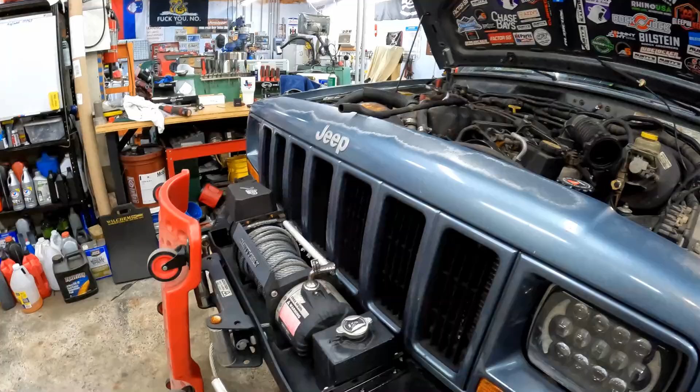So today we are going to be working on the Cherokee, and we're going to be redoing the transmission lines with PTFE or Teflon braided hoses with 6 AN fittings. And the reason we're doing that is because if you've seen the previous video, I added an oil cooler up under the front of this. See where my light's under there.

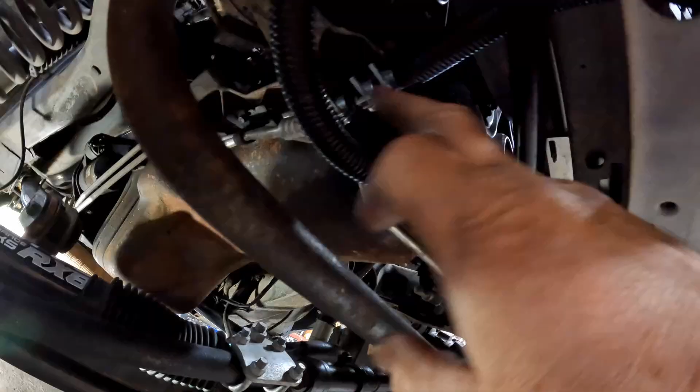So we added an oil cooler and experimented around with which hoses we were going to put the oil cooler in and stuff. And you can see this has all been just cut into the hoses that were already on here and clamped in a temporary fashion on barbed fittings, just for the experiment. And in doing this, I figured out how I want to mount the cooler.

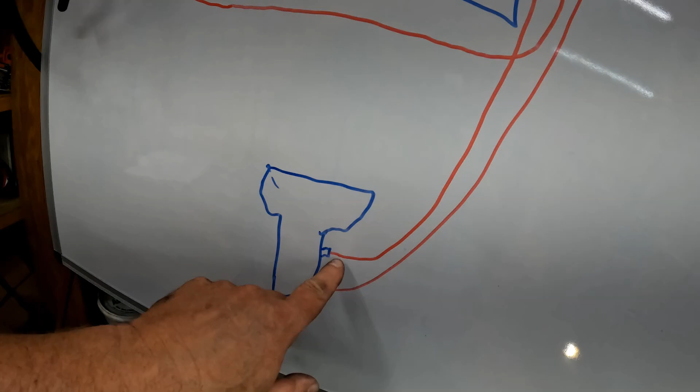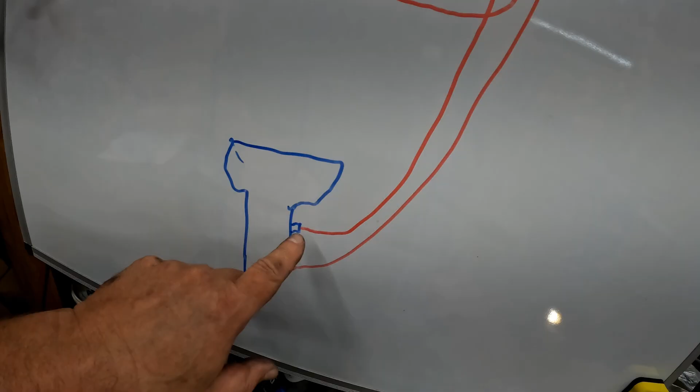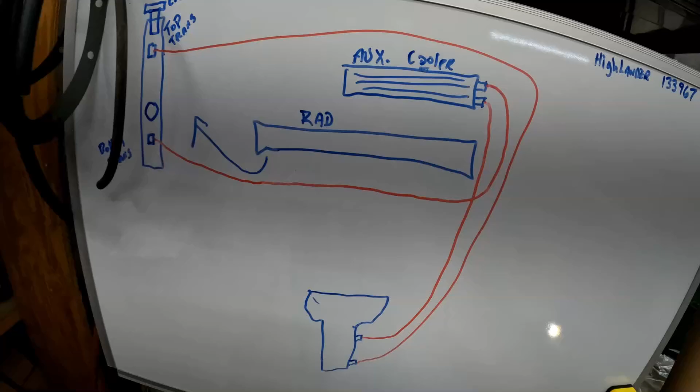So the way this is going to work is on the AW4 transmission on the Cherokee, the front line is the outlet, and the rear line towards the rear of the vehicle is the return. So we're going to run the line from the outlet here up to our auxiliary cooler, through our auxiliary cooler and out to the radiator, and then back from the radiator to the transmission.

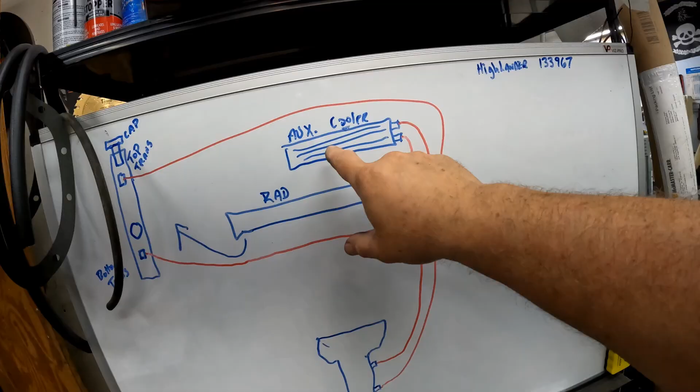What I figured out was this thing never really overheats, but every once in a while when it's really hot outside and you're going up a big hill, it would go a little bit above 210. And I wanted to get rid of that. I want to stay at 210 like it's supposed to. Well, I figured out that it was the transmission that was adding that extra heat to the radiator.

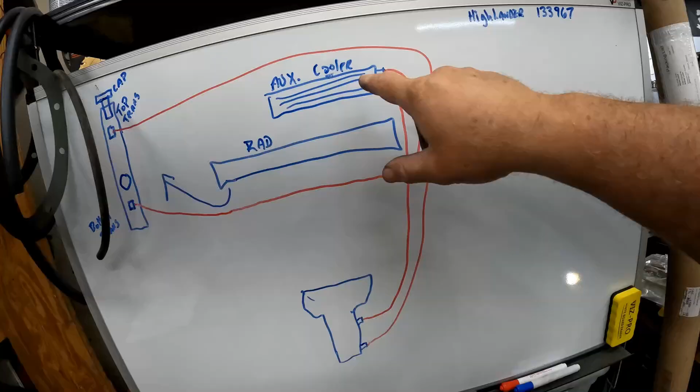Now, I've done two things to address that. One, I started shifting this thing into third gear manually rather than let it downshift, which prevents a lot of slipping. So that helps. And then we have this cooler. So by mounting it like this, we're cooling the oil down before it goes into the radiator. So then the radiator stays at 210.

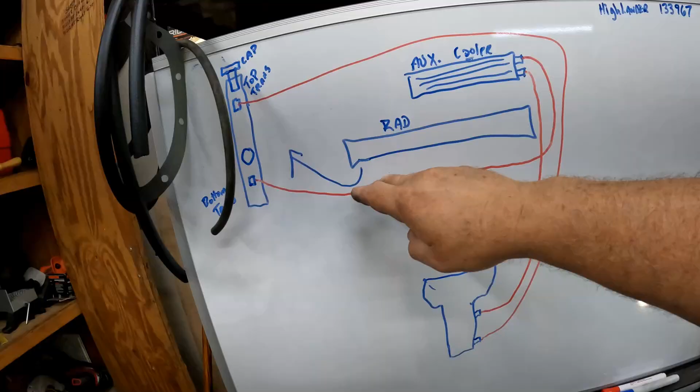But we're still getting the 210 degree oil coming out, going back to the transmission, so that you still get the wintertime preheat on your transmission oil. That's why they ran it through the radiator like that. So regardless of all that, what we're going to do today is we're going to build some AN fitting lines.

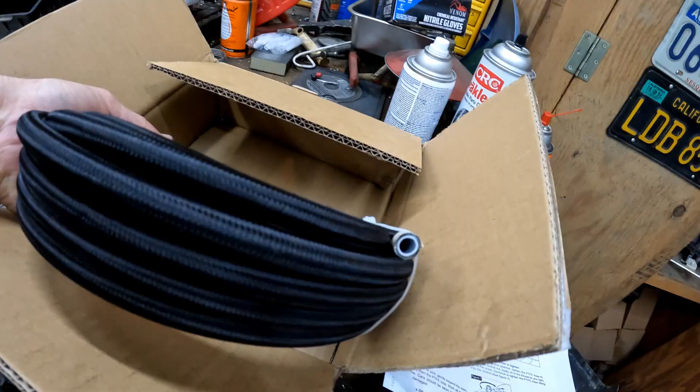So I've bought some PTFE Teflon braided hose and an assortment of fittings. Now there's some fittings that you have to get in order to make this work with the Cherokee. One of them is this, which is an inverted flare number 6 to a 5/8-18, and that is one of our radiator fittings.

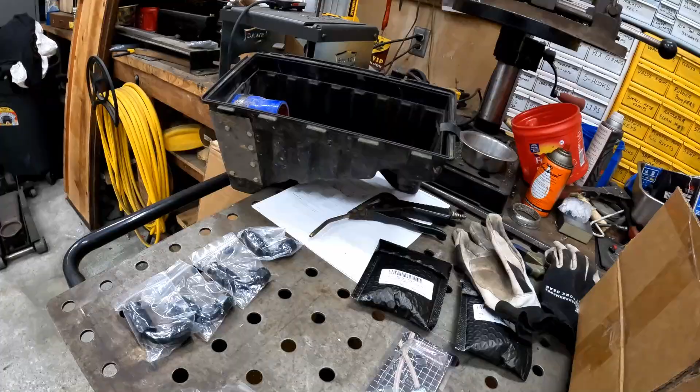And then you also need what they call a fuel line fitting for the bottom radiator, where the hose goes in the bottom of the radiator. Quick disconnect type. And then to go into the transmission, I think these are them. We've got some of these, which are... let me get my glasses on where I can read it.

These are M14 by 1.5 millimeter male metric fitting adapter, aluminum alloy, 2 pieces. So basically where the lines go in the transmission and those quick disconnects, it's an O-ring fitting. So these have an O-ring and they're metric on the one side and then AN-6 on the other. You could get all these parts off of Amazon.

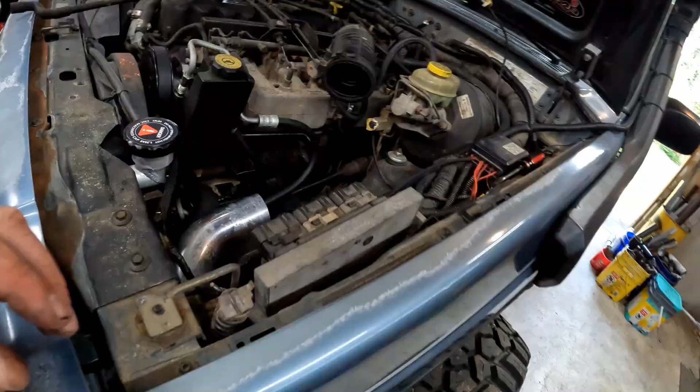And then I also have some 6 AN to 3/8 pipe adapters for my oil cooler. And you can see I have already removed my air box. I've got my intake pipe sticking out there, just to give me a little bit more room to get to these fittings where they go into the transmission.

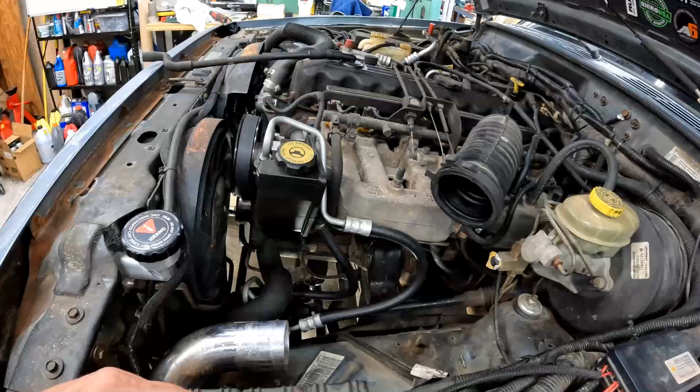So first things first, I'm going to go underneath and start stripping all of the factory lines off, because we're getting rid of them and I need to get them out of all their clamps and everything, and start draining the oil that's in the lines and the cooler out so that we don't make a huge mess.

Now I have a video for replacing the transmission lines with the factory ones, and you can search through and find that one if you're trying to figure out how to replace the factory ones. I'm not going to film taking all that loose because none of that matters. I will come back when we start to do all of the stuff to adapt it to work with the AN fittings and the braided hose. So let me get all that stripped out of there and I'll be back.

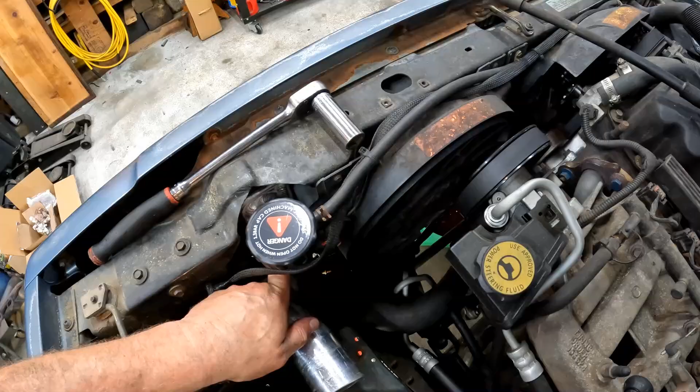Alright, I've got all of my lines pulled off and out of the way. So the next step is going to be to put the adapter fittings on the various places. Like for instance, here on the transmission cooler in the radiator, we've got to replace the top fitting with one that will fit a 6 AN line, and then the bottom is a quick disconnect, fuel line quick disconnect from the factory. So what we're going to do is use a fuel line quick disconnect to AN adapter.

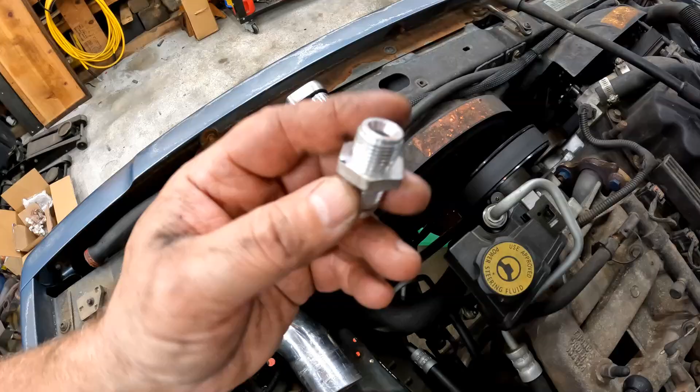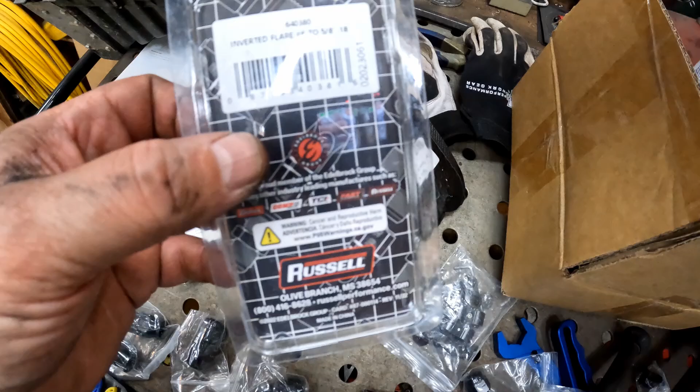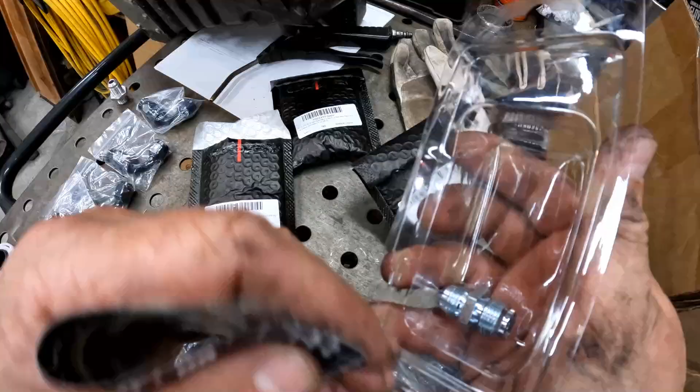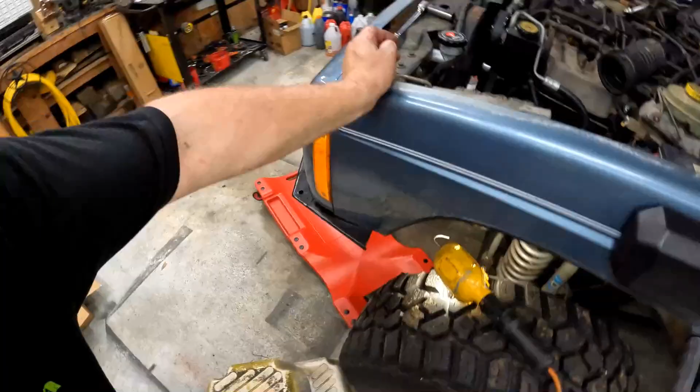So first we're going to unscrew this top fitting, which I loosened right before I turned the camera on, and you can see it is an inverted flare fitting, 5/8 18 thread here, but this piece is larger than a 6 AN. So what we've got right here in this box, we've got an inverted flare number 6 to 5/8 18. Right there. So we're going to screw that in place in this radiator, and that will allow us to attach a 6 AN hose to it.

And these inverted flare, they're much like a JIC fitting or other different fittings. They don't use O-rings, and you don't really want to put Teflon tape or anything on them. Now I'm having a little trouble getting this to thread in here. It should. There we go. Guess I wasn't holding my mouth right. So we're going to turn that in there and torque it down. Extension. Now we got it. All right, so we're ready there.

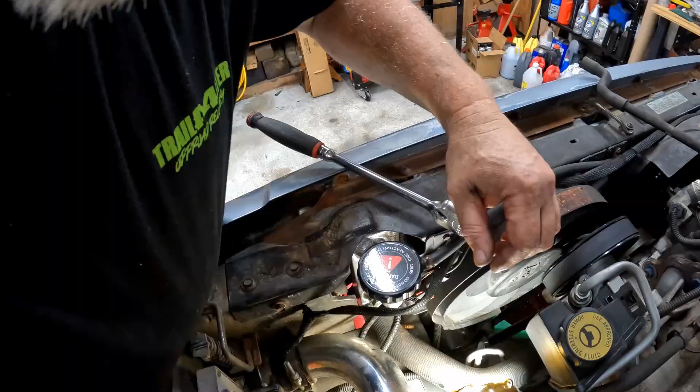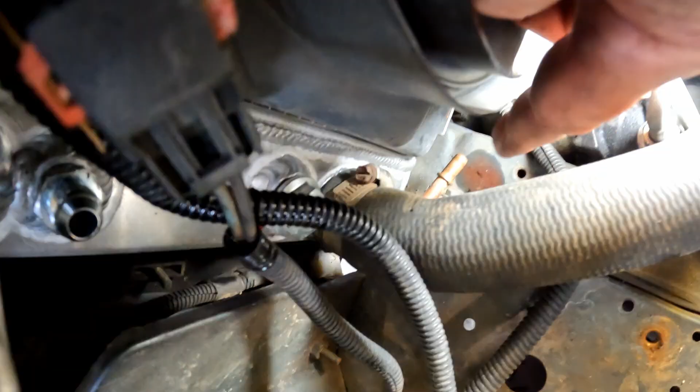Now we've got to do that bottom. So down there at the bottom, see if we can get this down in here. Down here at the bottom, you can see it sticking out right there. There's basically the kind of quick disconnect that comes on fuel lines and such. And since it's down there in that hole, and I can't really show you how it works down there, I have an extra, so I will demonstrate how this fitting works on this extra line.

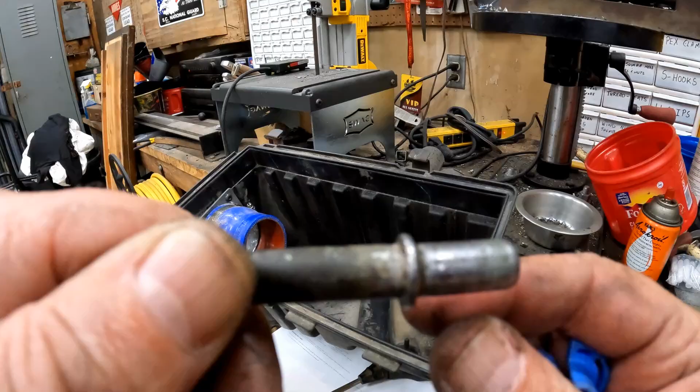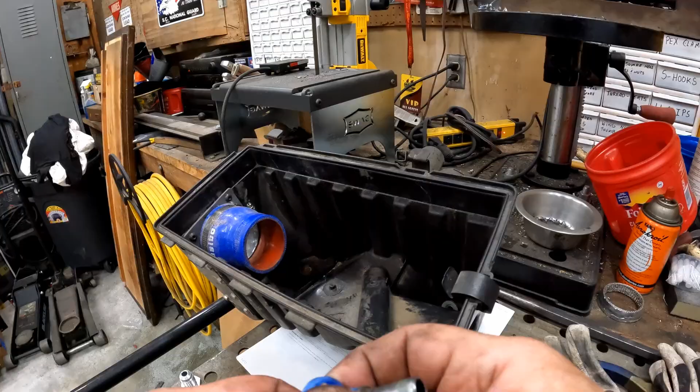So what I'm talking about are these type fittings here, and if you've been doing this for any length of time, you recognize this. It's got another piece that fits over the top of it with little clips that hold it in place, and then you have to use a tool like this and you push it up in there to release those clips from behind that lip, pop the fitting off. And the fitting has an O-ring in it, and it's built into the end of the old transmission line.

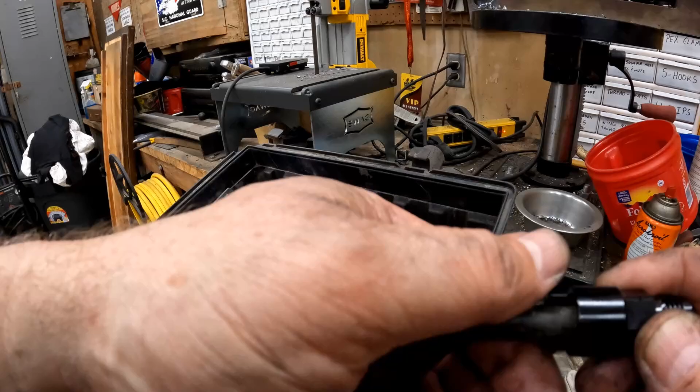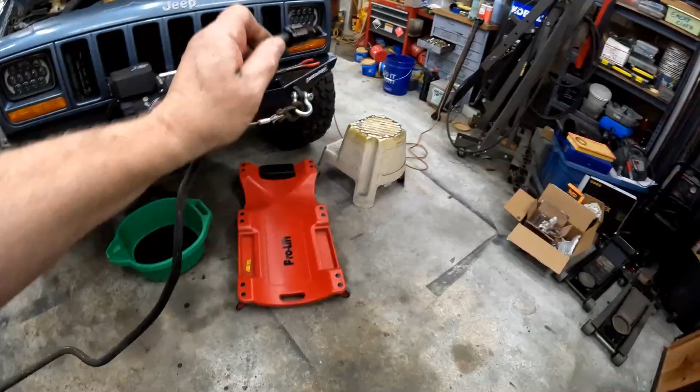So what you have for these type lines is this fitting. So you got 6 AN here, and then on the other end you got this kind of contraption looking. So this unscrews out of here like this, and this piece will go up on here like that. That's why it's got a slot cut in it. And then your piece with the O-ring down inside that fits on here and seals will slide on there like that, and then this piece screws into the back of it, and when it gets all the way down it catches the lip in there, and then you can screw your 6 AN line fitting onto it. So that's what I'm going to do down in that little hole, but there's no way I can show it to you down in that hole, so this is how that works.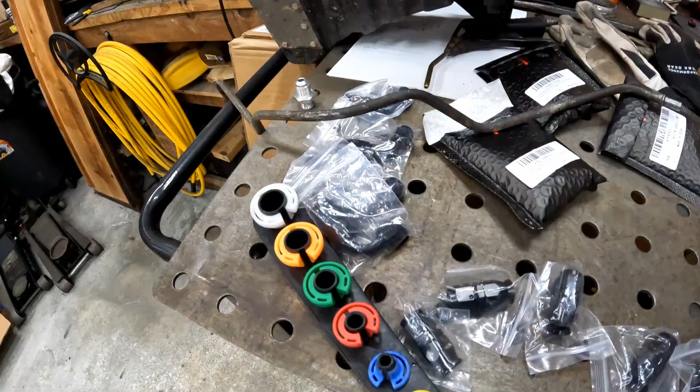So I'm going to get that one on, and I'll get the two in my cooler on, because they're just 3/8 pipe to 6 AN adapters. So I'll just pull the 3/8 pipe to barb adapters that are in it out, put the 3/8 ones in, we'll be good to go. And then we got the fittings to adapt to the transmission, which I'll bring you back for that part. Once we get those in, then we can start building the lines, get to the good part.

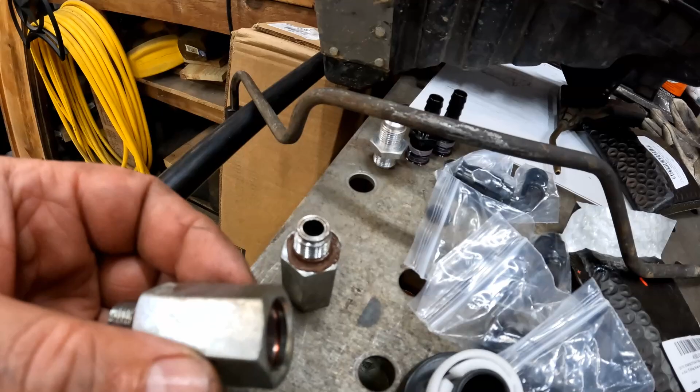So I'll be back. Okay, so I've pulled the two quick disconnect fittings out of the side of the transmission. So that's what they look like. We'll hold on to them because they're still good. And those are going to be replaced with these.

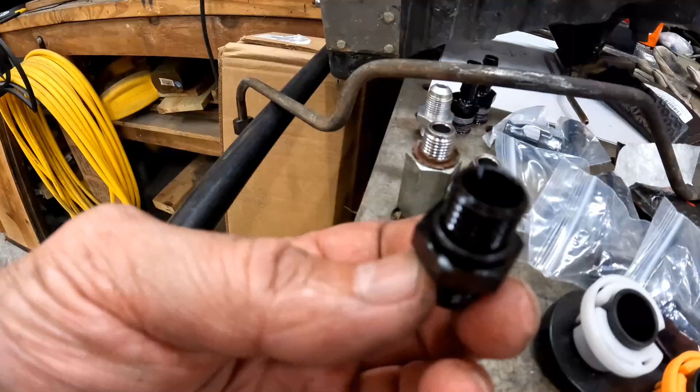Hold on just a second. So if you look at these, you can see the remains of a well overheated O-ring around that. They weren't leaking, but of course once you turn them it tears everything up. So you can see these new fittings are the same threads, and they're an O-ring fitting. So that's the adapter that you have to get.

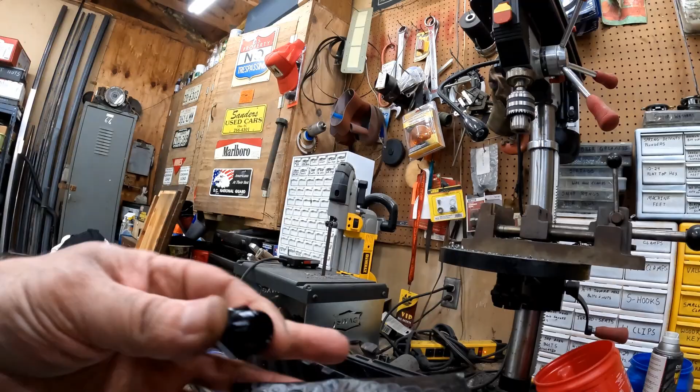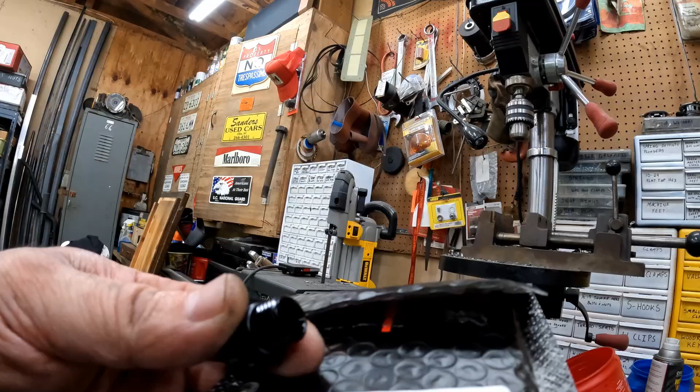It's got that on the one side and AN-6 on the other, and it's 6 AN male flare to M14 by 1.5 millimeter male metric fitting. That's what it says. And you can see there, pause it and get the serial number off of it. So we're going to screw these into the side of the transmission, and then we'll finally be ready to build our lines. So I will bring you back for that.

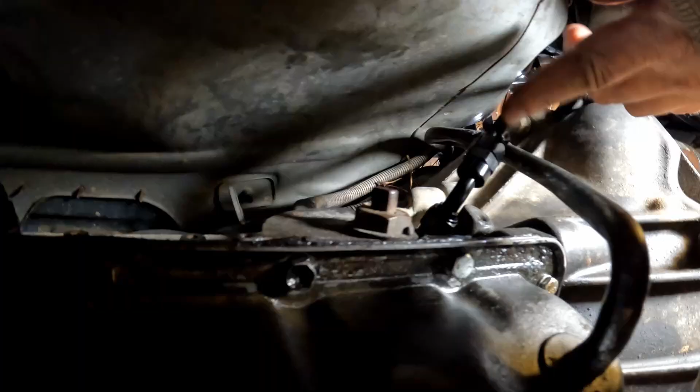Okay, let me show you what I've got so far. Hopefully I'll be able to get the camera up in here and you'll be able to see everything. So I've started to run the line going from the outlet on the transmission up to the cooler. So if we get this light shining where we need it, we're looking up in here, and here is the AN fitting. I was going to use a 90, but I ended up having to use a 45 because a 90 was interfering with the dipstick tube right here. So I used a 45, and it's not touching the dipstick tube, it's close.

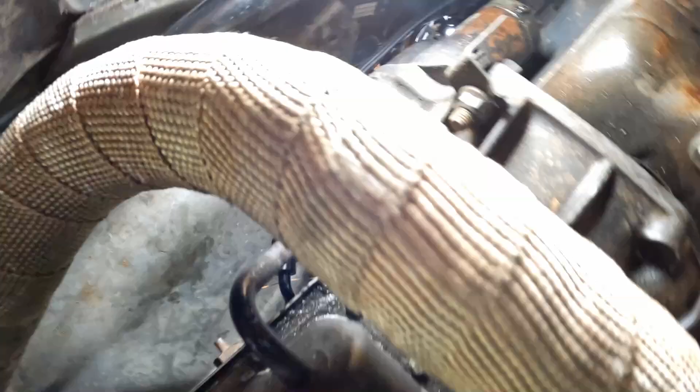And then we've got that run up along there. I'm going to use the old bracket for the little short arm suspension up there to tie it down, since I have long arm suspension now. And get you flipped around here with the light. You can see we've got it run right there along the top of the frame rail, over that bracket, and on up to the front, where we will go now to mark it so we know where to cut it. And then we will cut it and put another fitting on there, which I will show you.

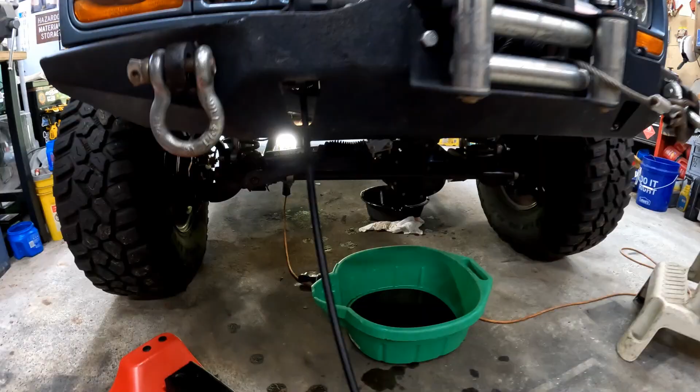I got ahead of myself and did the first fitting and forgot to turn the camera back on, but we're getting there. So we'll grab our creeper. This would be a lot easier if I had a lift, but I don't really have a high enough ceiling for a lift to be a viable option. Get down here where I can show you this other end.

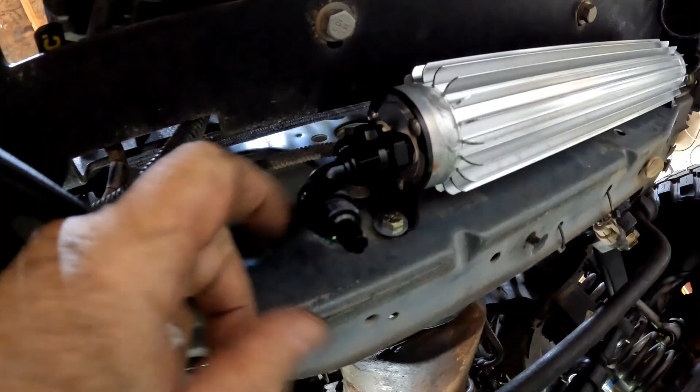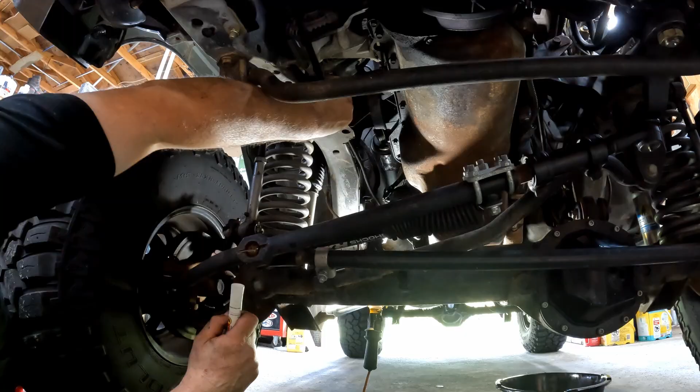So we've got our hose coming down the frame rail there and out here, and right here we've got a fitting loosely put in there. So we just need to, hold on, let's see if I can get it. All right, we've got to get the hose back up there where we want it. Keep enough slack in it. Lay it over here, and then we can mark it where we need to cut it to put the fitting on. Right there.

So now we've got our mark on the hose right there, and we can take this fitting back off and take the fitting at the far end back off and bring the hose up on the workbench and cut it and fit this fitting on there and get our first line done. So let me get the hose out from there and to the workbench.

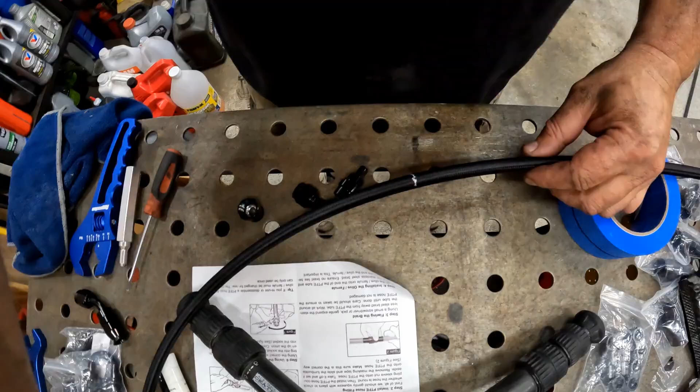Okay, so we're back on the workbench now, and we've got our hose here. We've got our mark we made where we need to cut it. So I've got some masking tape that I have drawn a center line on. We're going to take a piece of that and put the center line on our mark, and wrap that around nice and tight, like so. And then we can put it on our handy wood block here and take a cut-off wheel and cut it off.

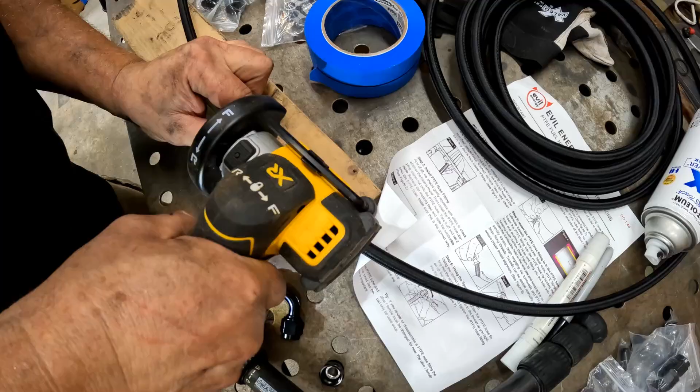Like so. So now what we want to do is take our air hose and make sure to blow all of the debris out of the hose from cutting it. So we don't want that mess getting in our transmission.

So now we have our hose cut to length. We can move this over here. And what we need to do now is we've got our other two pieces of our fitting here. Fitting is 3 pieces, so we got our 90, the piece that screws up on it, and then the ferrule.

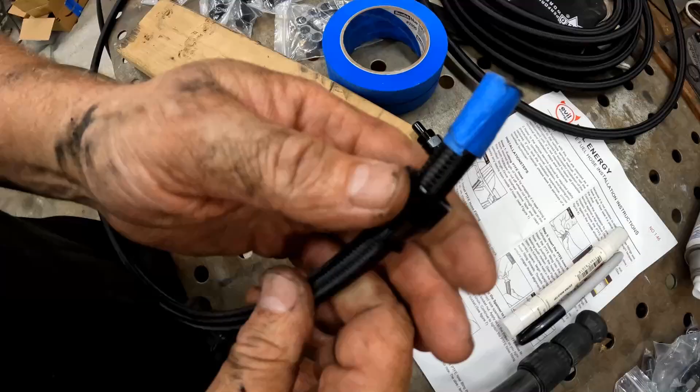So the first thing we want to do is take this piece, and while we still have the tape on there, go ahead and slide it over like so, so that it's ready to screw back onto the end of your fitting when you have it on there. So stick that on there, let it go down the way there, and then we want to take this masking tape off. And what the masking tape does is keeps all this from getting all unfurled when you're cutting it.

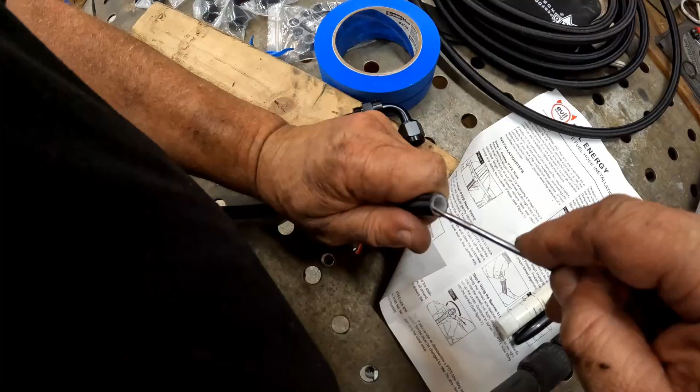So now what we've got to do is take a screwdriver, and you can see here there's the white Teflon hose in the center, and then there's a layer of stainless steel braiding, and then the layer of the poly braiding on the outside of it. And what you've basically got to do is take the screwdriver and start pushing that braiding away from the center hose, and you just got to go around and around it.

And I got a little tool that'll stick in the end of it like this to kind of keep it from deforming while I'm doing this. But anyways, don't dig into the Teflon hose, just start working your way around there and pulling all that braided back from the plastic, just like that. Don't stab yourself in the hand. It's very important.

But you've got to go all the way around this thing and get this stuff worked back. And it's kind of a pain in the ass, to be quite honest. But the end result will be worth it. So it's very important to get it all pulled back, every little strand of it, because if you get a strand of that braided cord under there, when you go to put the ferrule on, it'll end up making it leak. So you just got to keep working it.

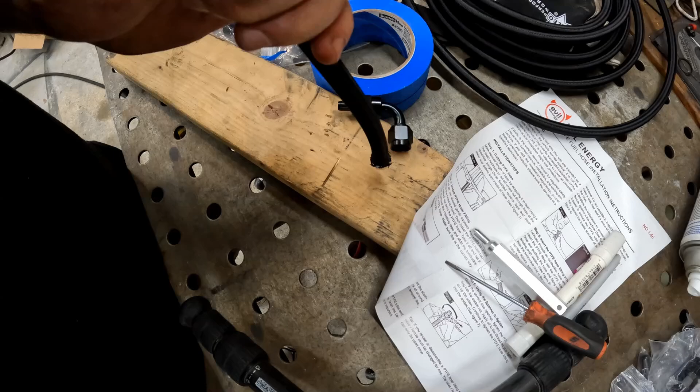Once you've got it worked around like that, where you can get this ferrule in there without getting any of that trapped underneath it, then you can ease this thing, start easing it on there, and then flip your hose around on your table and push down on it, kind of wiggle it and get that hose pushed down in that ferrule.

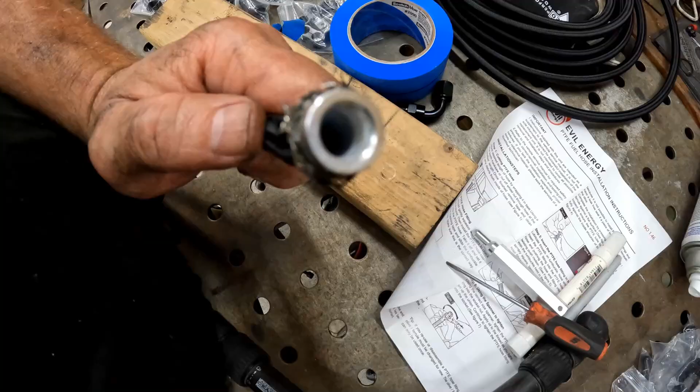And you can look, when you get it pushed all the way in, you can look around the edge of it right there and see that that hose is all the way up to the, there's a lip, so you can't push it all the way through. Right? So once you're there, then you can take your little tool. Now this tool came with the hose, and you can kind of do like this, kind of get that all ready for your fitting to go in. So then you twist the fitting down on there till it's like that, just like that.

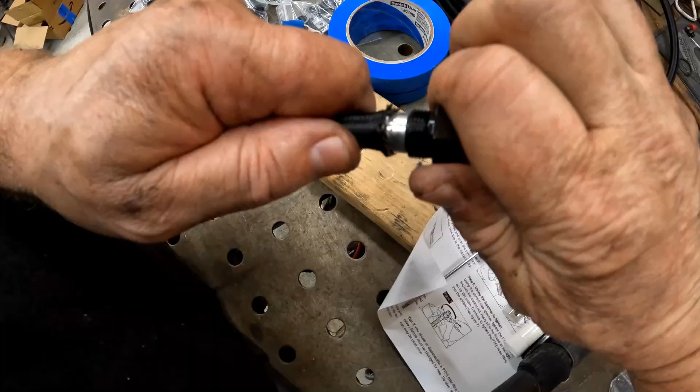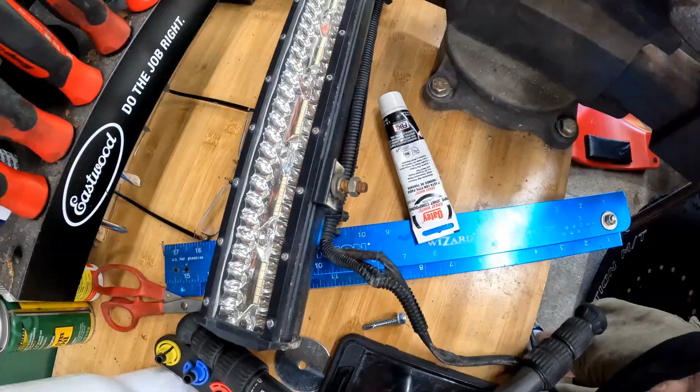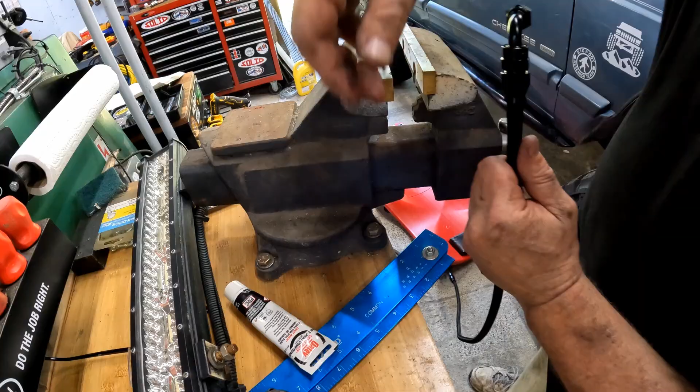Now take your ferrule piece here, and it says in the directions to oil these threads. Slide the fitting up there and start it onto here, and get it hand tight, and then come over here and stick the bottom half in the vise there. Now you don't want to crimp this. It's just aluminum, so just very, very light pressure, just enough to hold it.

And then you get, now I bought the aluminum wrench for these, but you don't have to use that. You can use a regular wrench. And once you get that hand tight, then you're just going to tighten that fitting the rest of the way down in there. And you'll feel it when it bottoms. I need to finish tightening this one. And there we go.

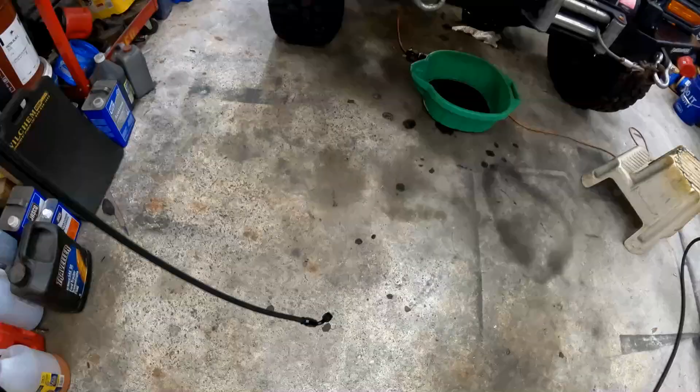One AN line. So now we can go in there and stick this up in its spot, and I will tighten this end at the transmission. And this end I will leave loose because I need to make the next line going from the auxiliary cooler to the radiator cooler and put it on, because it's the upper one on that cooler, and you can't get to the fitting with the lower one in place. So let me get this laid in there and then we'll make another line. So I'll be right back with that.

Once you've got it worked around like that, where you can get this ferrule in there without getting any of that trapped underneath it, then you can start easing it on there, and then flip your hose around on your table and push down on it, kind of wiggle it and get that hose pushed down in that ferrule.

And when you get it pushed all the way in, you can look around the edge of it right there and see that that hose is all the way up to the lip, so you can't push it all the way through, right? So once you're there, then you can take your little tool. Now this tool came with the hose, and you can kind of do like this, get that all ready for your fitting to go in.

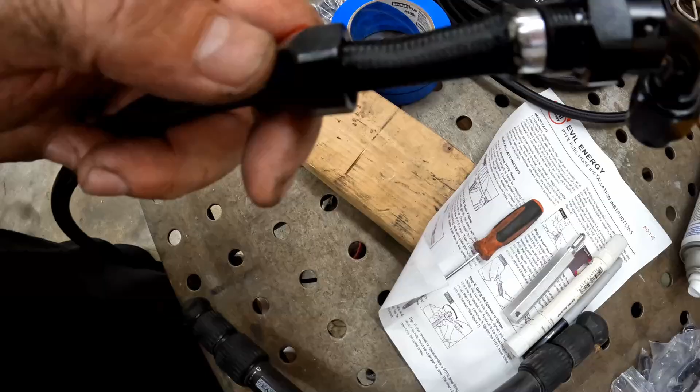So then you twist the fitting down on there till it's like that. Now take your ferrule piece here, and it says in the directions to oil these threads. Slide the fitting up there and start it onto here, and get it hand tight.

Then come over here and stick the bottom half in the vise there. Now you don't want to crimp this, it's just aluminum, so just very light pressure, just enough to hold it. Now I bought the aluminum wrench for these, but you don't have to use that. You can use a regular wrench. And once you get that hand tight, then you're just going to tighten that fitting the rest of the way down in there.

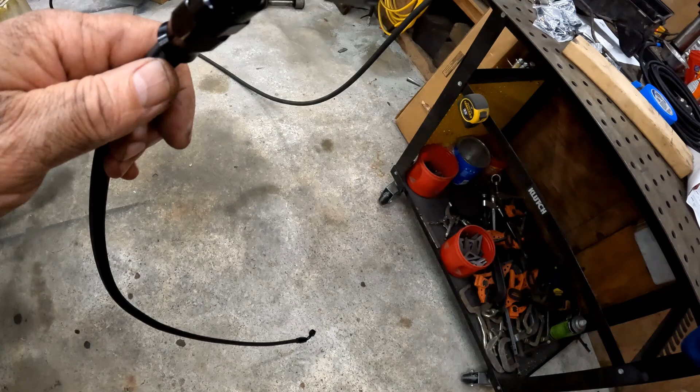And you'll feel it when it bottoms. I need to finish tightening this one. And there we go. One AN line.

So now we can stick this up in its spot, and I will tighten this end at the transmission, and this end I will leave loose because I need to make the next line going from the auxiliary cooler to the radiator cooler and put it on, because it's the upper one on that cooler, and you can't get to the fitting with the lower one in place. So let me get this laid in there, and then we'll make another line. I'll be right back with that.

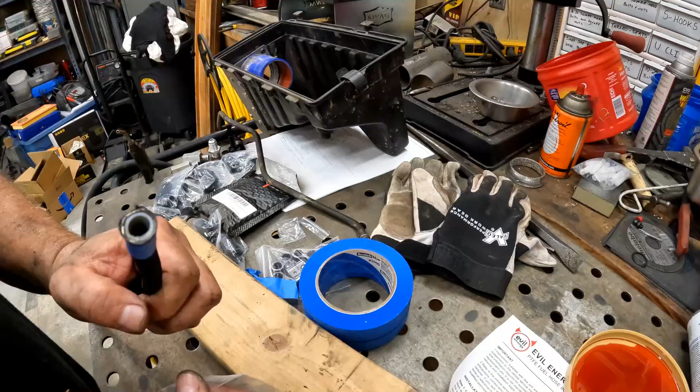All right, the next hose we've got to make is going from the bottom of the radiator to the auxiliary oil cooler, and it's basically going to be two of the straight AN fittings. So we've got the end here that we cut before, and we're going to remove the nut and the ferrule from the fitting, and we're going to take the nut and put it on the line before we take that tape off. So that's on there, and now we've got to take this tape off.

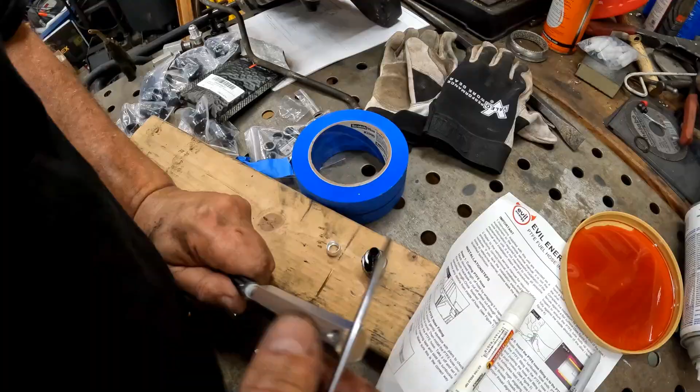And one thing about this line is it is definitely stiff. You are not going to make any real tight turns with it. That is a fact. Alright, so we've got that off. Now we've got to do just like before. We're going to have to go around it, stab ourselves in the hand a couple of times, and get this braiding away from the Teflon on the inside. So that's widened out.

Get the ferrule on there and started, and then try to get it pushed down in there. Alright, there we go. We've got our ferrule in place. Now we can take our straight fitting and put her in place and oil the threads and everything up.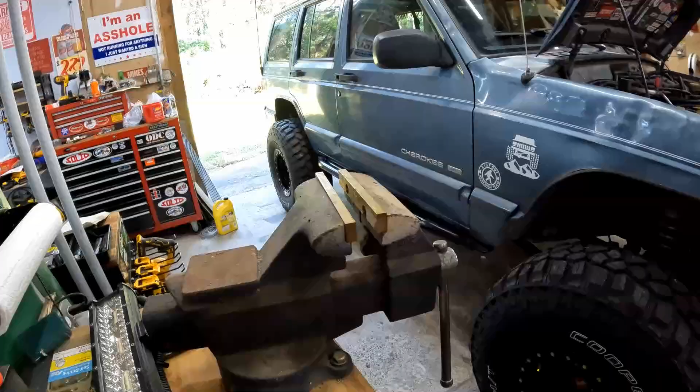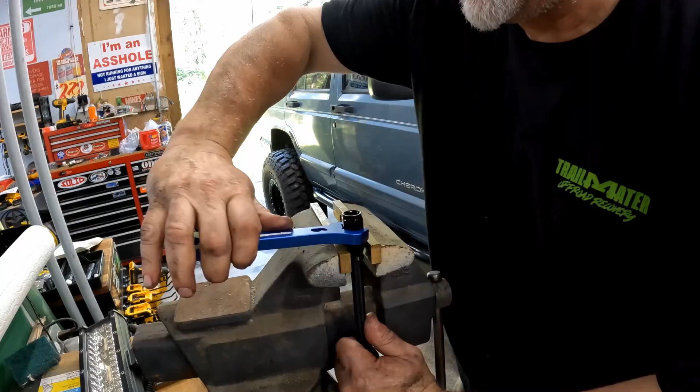Find our ferrule that has managed to work its way all the way down the hose. And just like before, we're going to start the threads by hand and then carry it over and put it in the vise. And there we go, we are bottomed out. So now we've got that one done.

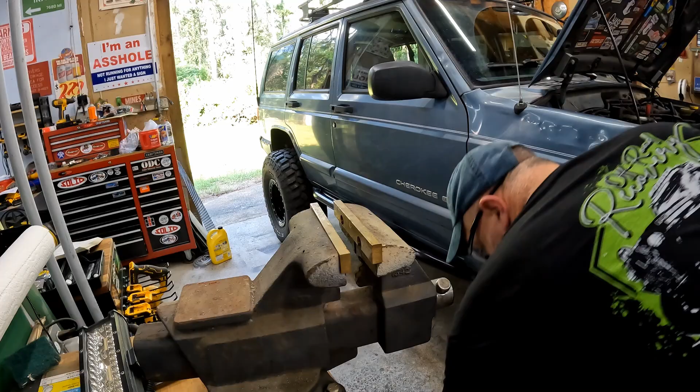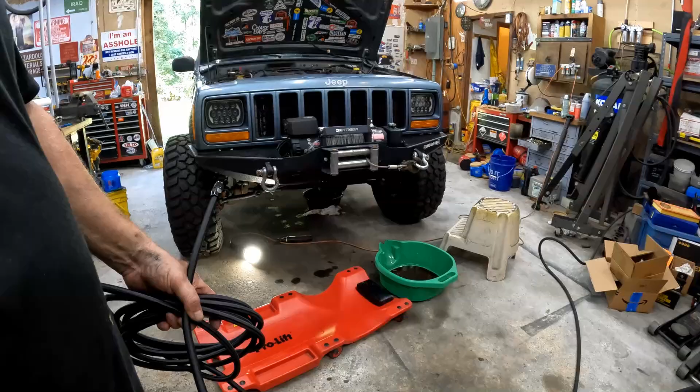And now, just like I did with the first line, I'm going to go underneath there and fish this thing up through to the bottom radiator fitting for the oil cooler, and hand tighten it on there, and then I can figure out where I'm going to route the line and everything. So let me get that done and I'll be right back.

So just like before, I've got my hose marked. I'm going to cut it. Then we're going to take our air and blow that all out. So we need another straight fitting on this one. Once again, unscrew the nut off the back and take it and the ferrule and set them to the side. Grab this piece, put it on the way it's supposed to go.

You want to get that on there prior to when you start pushing the braided part out to get the ferrule on there. So we'll take the tape off, and just like before, we will wrestle with this thing for a little while, stab ourselves in the hand, and get this ferrule put on here.

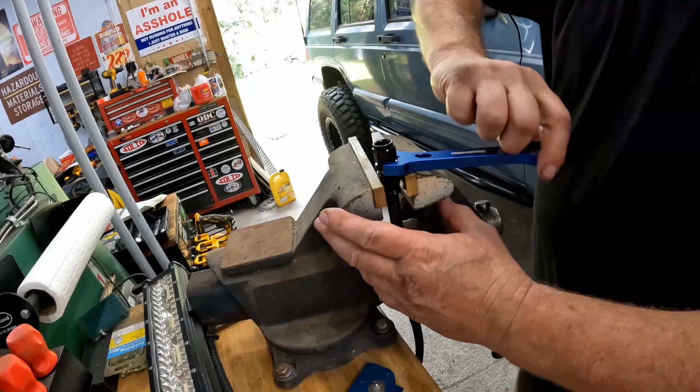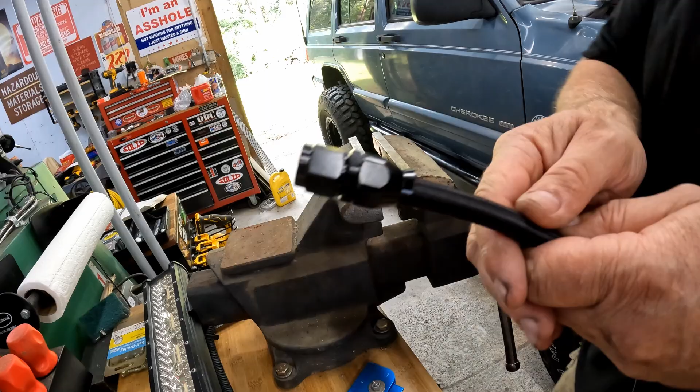Then take our fitting, put a little oil on it, slide her on in there like so. Take some more oil and put on the threads. And go to the vise. Tighten that on down using our fancy aluminum wrench. And we've bottomed. There we go. A nice AN fitting line.

So I'm going to go put this one on and then make the other one and put it on and get everything buttoned up and strapped up, and then I will bring you back and show you all the lines installed. So we'll be back for that. All right. This took a lot longer than I thought it was going to. The end result is awesome though. I'm really happy with them. But they weren't as quick as I thought they would be. But let's take a look.

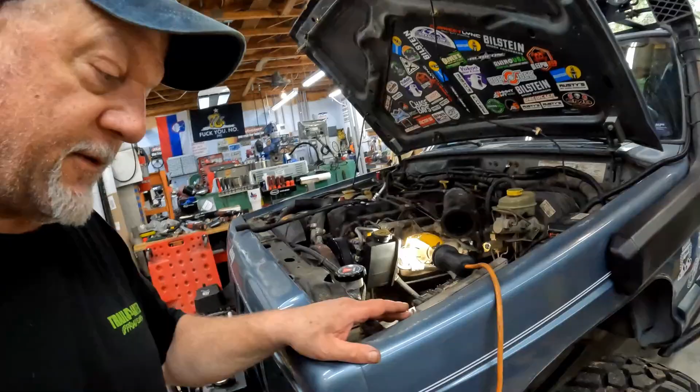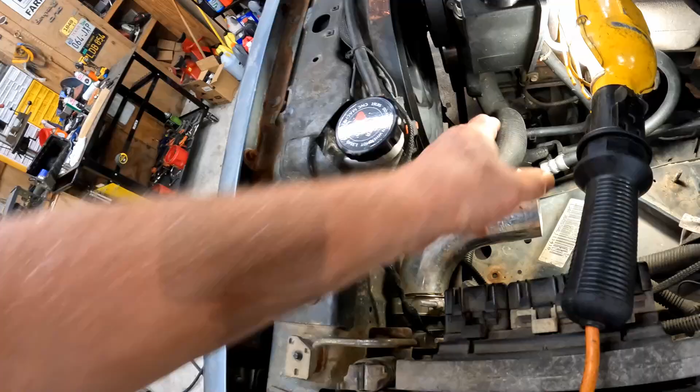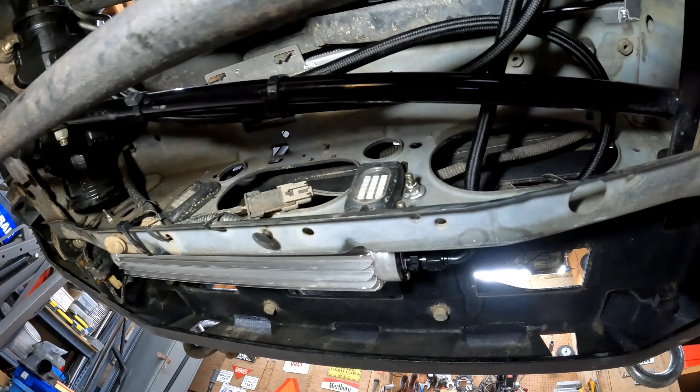All right, my lines come down from the radiator there, and they are secured to this cross beam for my power steering pump strengthener. So that's not going anywhere, and that keeps them well far away from that front crankshaft pulley. And then the one line that's coming from the transmission, it comes out to here, and you can see we've got our two AN fittings on our oil cooler now.

And then the lines run, sorry about all the moving around, and the lines come back. I've got these little clips, and they're actually aluminum. I'm surprised. They came with the hose kit. Pretty high quality little aluminum clamps to hold the lines, and they're run along that frame rail on back to, let me slide around there.

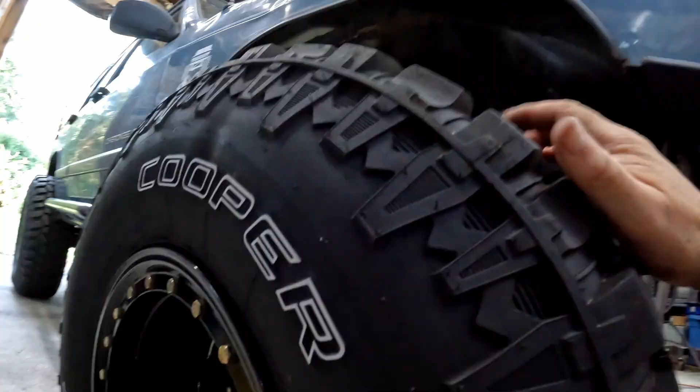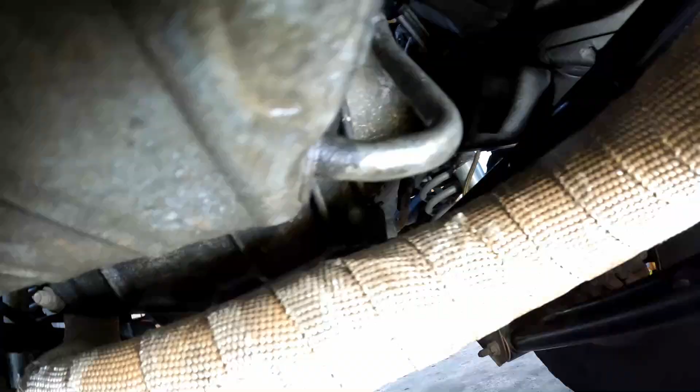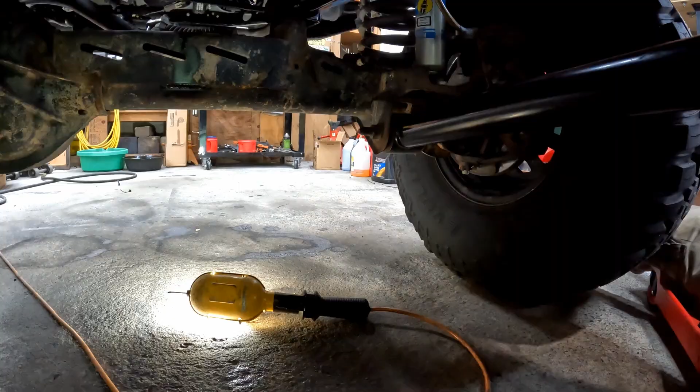Oh. All right, and you can see up in there they are secured using a tie wrap to the old socket where the upper control arm used to mount before I went to the long arm suspension. And then they come back and they are into the side of the transmission and good to go. So now I gotta spray a little bit of brake cleaner along the side of that transmission and clean all that oil up. Y'all excuse me while I slide out front of the truck again.

And then I'll put my air box back in and crank this thing up and let it warm up, run it through all the gears, check the oil, add oil, and be done. But I'm not going to bore you with all that because the part that we were here for, which was adding the lines, has already been accomplished. And I think those are going to work good, and I trust that a whole lot more than I trust a rubber line with a bunch of hose clamps on it. So that should work good for us.

Anyways, hopefully this has helped you out. This is the first time I have ever put together those AN fittings on the braided line like that. They're not that hard. Really the only pain in the ass part of it is pushing the braided covering on the hose, the stainless steel braid and the poly braid, back from the Teflon tube to get the ferrule in place. But once you get that, now you got it whooped. So we'll see how it does, and if there's any problems or anything, I'll be sure to let y'all know.

But that's just one of the Teflon hose kits that you can get off of Amazon. I think Evil Energy is the brand name. We'll see how it works.